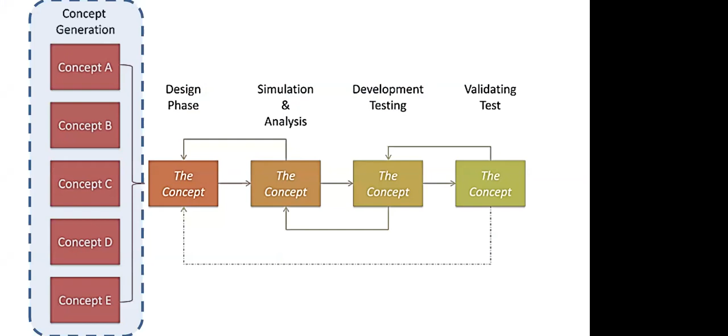We got a good number of registrations. We expect the same kind of people also getting connected today. We hope for the best. Sorry, say it again? We got a good number of registrations till date. Oh that's good. You see what happens in this industry, as more and more people get to know you, it spreads. So there's no harm if more people join and they get to know you more and more. Absolutely sir, you are right.

Okay, I think that hum is still coming. I don't know, it's very bad actually, it was not there last time. That's very surprising actually. Now I'm just going to see, is it by any chance from me? Can I do something with my mic? Is it my mic? But it's the same computer as last time. I'm a little surprised if it is so. Why should it be there?

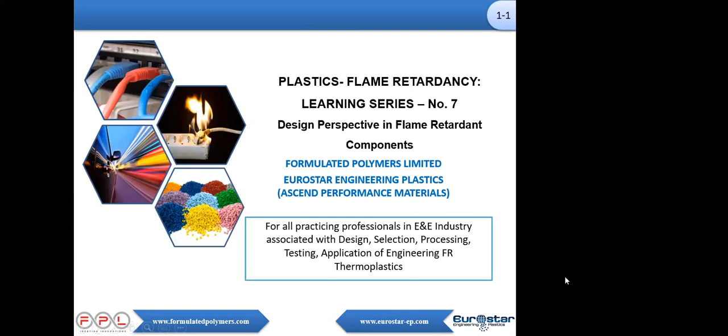I think we already have around 24 participants, so we can start. Incidentally, Prashant and Chaudhary, I think this is the time we had something like 800 people showed interest to participate. This is the 7th series, but we normally used to hit around 350, 400. This time, speaker being so good, I think we had 800 plus interest. I'm sure people will be joining.

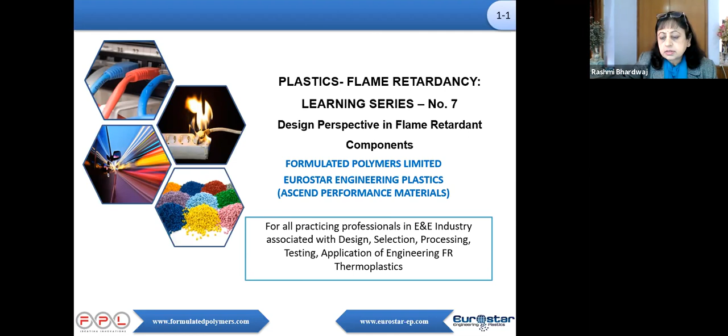Oh, I'm not able to change my screen. Yeah, just. So my name is Rashmi Bhardwaj. I'm Vice President Development with Formulated Polymers Limited. The webinar will be for around 45 minutes, 40 minutes of presentation and around 10 minutes of question answer.

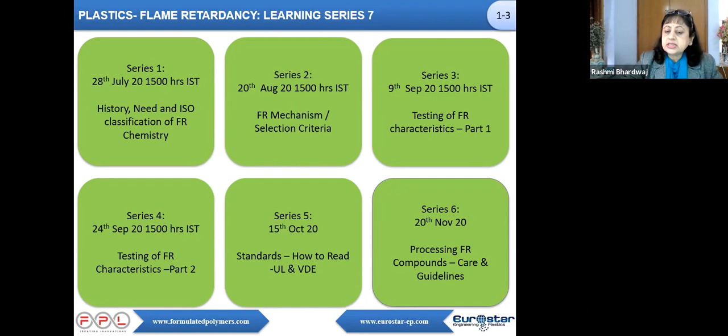Just to do a quick recap, we have done 6 series as of now on flame retardancy. First series was on history, need, ISO classification of FR chemistry. Series 2 was on FR mechanism and selection criteria. Series 3, testing of FR characteristics, part 1, and part 2 was series 4. Series 5 was on how to read various standards, and we had presenters from UL and VDE. Then series 6, Alexi and Satish gave a presentation on processing of FR compounds.

In future, we have series 8, 9, 10, and we will have a few more series also. The environmental impact of ROHS, REACH compliances will be the next series. Then we'll be looking into post-care, pad printing, laser marking, etc., and 3D. Then series 10 will be on cross-link polymer FR systems, and series 11 on applications of FR compounds. So basically, we'll be closing with the future trends.

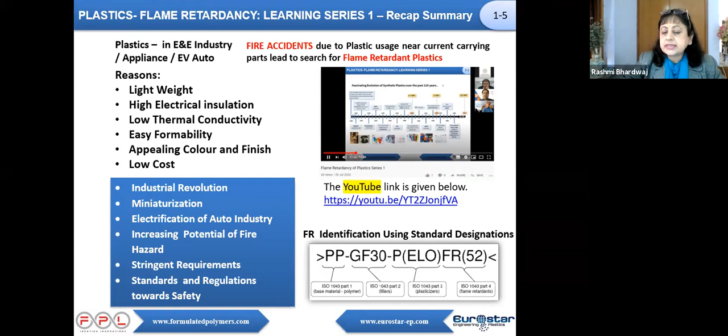In case we feel that there is a need or a request from all the participants, we will go in for a few more series based upon the requirements. All the series which we have done till date are available on YouTube, we have a YouTube link. Except for a couple of them, like in case of UL and VDE, it'll be available on their websites. So I think those presentations we have not shared, but all our other presentations we have shared with the concerned participants.

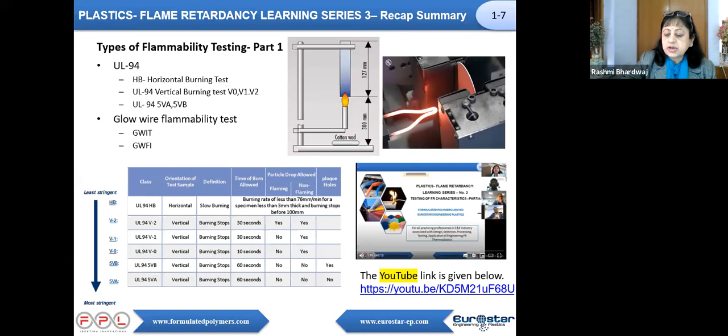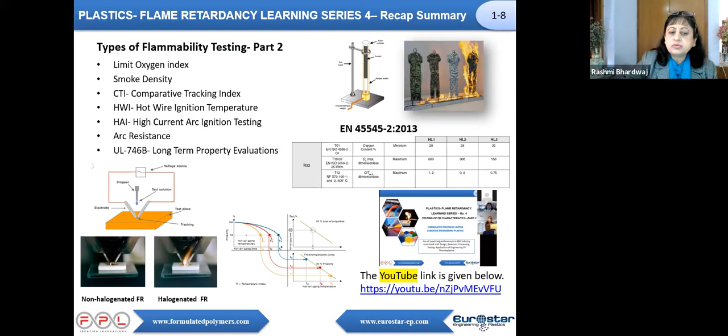For flame retardant mechanism, we covered various halogenated nitrogen, organic phosphorus, inorganic phosphorus, metal oxides, boron and zinc, silica compounds, and then we did a couple of series on testing. So we went into detail regarding the UL94 and the glow wire flammability tests, which are one of the most critical tests. We also covered LOI, smoke density, CTI, then hot wire ignition, arc ignition testing, arc resistance, also the long-term property evaluations as per UL746B.

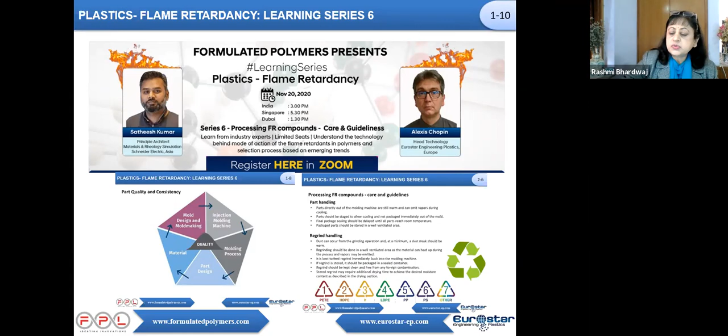This was a series where we discussed standards, how to read UL and VDE. In continuation, we had processing, where Satheesh from Schneider and Alexis from Eurostar Engineering Plastics gave us a detailed overview of the care and guidelines which we have to take during processing of FR compounds.

Some industry professionals have already presented, some have agreed to present. We would request industry experts and professionals to come forward and present future learning programs. It's a sharing platform, and we would request everyone to share the knowledge they have gained, so we can take this forward and make it much easier for the next generation working on similar products and looking for better performances.

Since Eurostar Europe and FPL Asia specialize in compounds of engineering polymers, most of the examples would be based upon polyamides, ABS, polypropylene, HIPS, MPPO, polycarbonates, and certain blends of polycarbonates.

Before we start talking about Formulated Polymers Limited, we have the Starflam grades and the Form Poly grades, both available in reinforced and unreinforced ranges, with various properties like high impact and tight tolerances. Complete UL yellow cards in all colors, with CTI values going up to 600 volts, RTI values of 120, which can go up to 150 degrees centigrade.

This is a slide which we have shown in all our presentations, just a summary of the FR systems, where we have a very high level of competency.

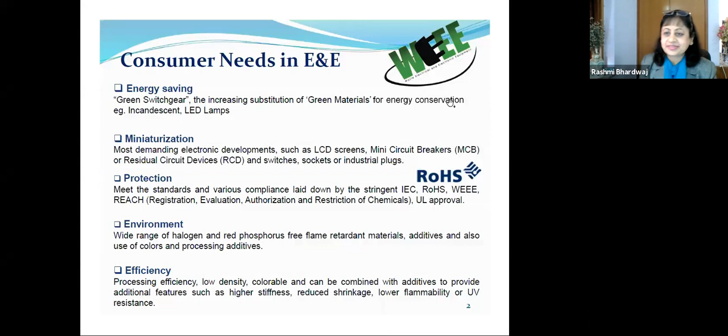So what we are talking about is the different criterias, one of that is the miniaturization. You are basically reducing the size of the product. The moment you reduce the size of the product, obviously the material quantity will come down, cost also will come down, and the panels, that is switchboards and other areas where we are mounting these products, that also will require less space.

Floor space will be less, but unfortunately, whether we like it or not, all metal parts, that is conductive elements like copper and silver, because of current density, their dimensions and thickness will not change. So whatever has to be compromised is the plastic part, and once the plastic part gets reduced, it has to withstand high mechanical load, short circuit conditions, and other severe conditions. Even temperature severity for the smaller size will increase. So as far as plastics are concerned, the selection becomes tough once you reduce the size. Of course, that is for added advantage.

Examples, as we know, mini circuit breakers, residual current devices, RCDs, and all, from a protection point of view, we look for certain compliances like IEC, ROHS, WEEE, REACH, all of which are already covered by the formulated series. Environmental aspects, when we say environmental...

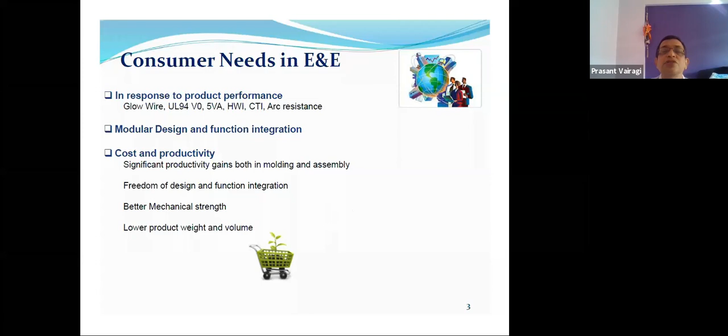Now, as far as insulating materials are concerned, various materials that we use are thermoplastics, elastomers, thermoset composites. We also consider alternates for metal, alternates for thermoset composites, and modified thermoset composites. I am not going to discuss much on insulating materials, but just to brief on the various...

semi-crystalline materials that we use - nylons, PPS, PBT, all types of polyesters, polypropylene, polyoxymethylene, polyacetal - what we commonly know. Amorphous materials like PC, ABS. Elastomers, thermoplastic elastomers I am talking about - polyurethane, EPDM. And alloys and blends like PP-EPDM and polypropylene-nylon 6. Those are also equally important.

Thermoset elastomers typically used are polychloroprene rubber, commonly known as neoprene rubber, and nitrile rubber. Neoprene rubber is inherently flame retardant, like how PPS is inherently flame retardant, whereas nitrile rubber is not, but nitrile rubber is cheaper. Nowadays, there is a focus towards nitrile rubber because of the cost aspect. Silicon rubber and fluorocarbon rubbers, commonly known as Viton, which is the brand name.

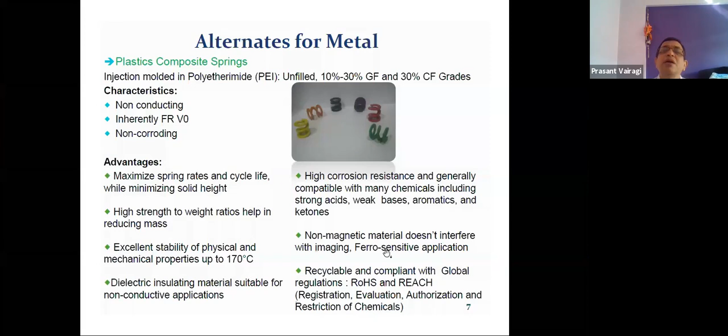From outside it looks like this is the handle, and when you rotate the handle, actually this is the rod for mounting it. When you rotate it, inside there is a bridge which moves left and right, going through a neutral position and making on and off positions. Now, if it is mounted vertically, the bridge, because of its weight and the metal contacts like copper, will fall down, so it will always create either an off or on position.

So in order to prevent that, the product designer has designed a spring. This is that spring, which you can see in blue color. Now the beauty of this material is that it is actually covered within the housing and bridge cross section. Earlier, we had designed it with thermoset, considering the arc aspect. But considering lower cycle time, productivity from the thermoplastic aspect, lower cost, faster production rate, and recyclability, we introduced thermoplastic polyurethane, which is working very fine.

So what aspects have we considered? High pressure and superior load bearing capacity, excellent flex life, high abrasion resistance, high cut or tear resistance. This is very important because the bridge material is thermoset SMC with 30% glass reinforcement, so it will abrade the material like anything. Oil resistance or grease resistance is also needed, since contact grease is used. So all these aspects, excellent noise abatement, and vibration dampening are things we have to consider while selecting a material or even designing the component.

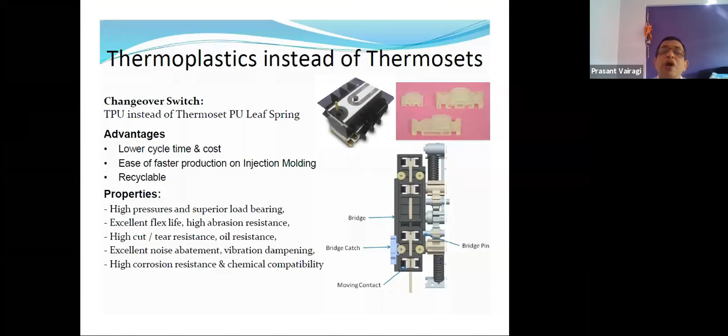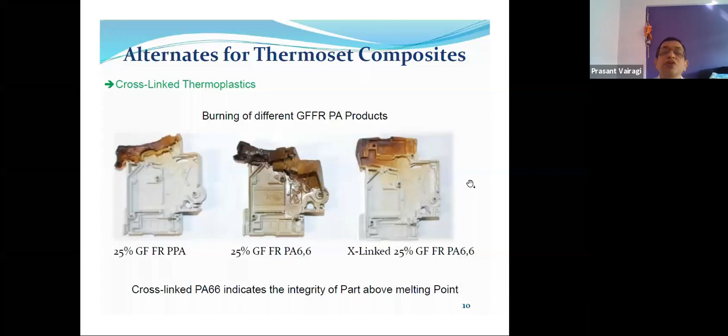Whereas if you see here, the cross-linkable material has only given a white stain. Here also, if you see the glow wire, it is only a stain mark. You can't see any other effect as far as melt deformation is concerned.

So this can be treated as an alternate to thermoset composite if you go about it the right way. It is basically for boosting the short-term high heat resistance while keeping the same injection molding process. That means your thermoplastic mold will remain the same. You can take advantage of all the thermoplastic design features, which is not practically feasible with thermoset material.

FR V0 glow wire 960 compatible, it is a good balance between mechanical and electrical properties. The only disadvantage I can see is the higher cost, because certain other advantages, like WEEE ROHS compliance and good surface appearance, as it is thermoplastic, the surface appearance is excellent.

Design freedom versus thermoset is basically you can design thin wall moldings, you can have click fit sections, you can even do ultrasonic welding before radiation. So all those advantages, whatever the product designer feels like adopting, he can do, and later on do the cross-linking. So faster cycle time, colorable, laser markable, with lower weight versus thermoset. Thermoset materials density is high, the weight is also very high.

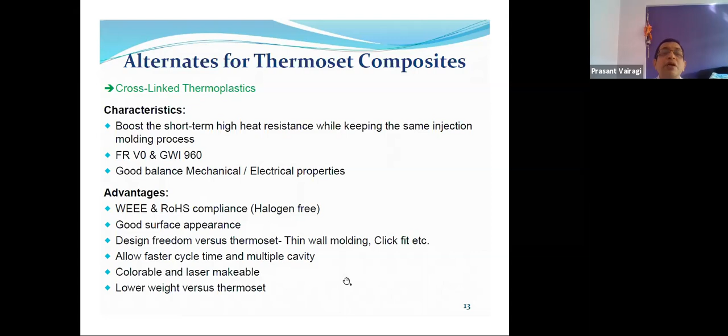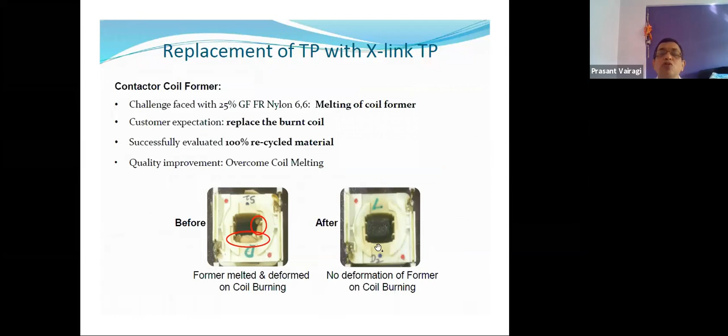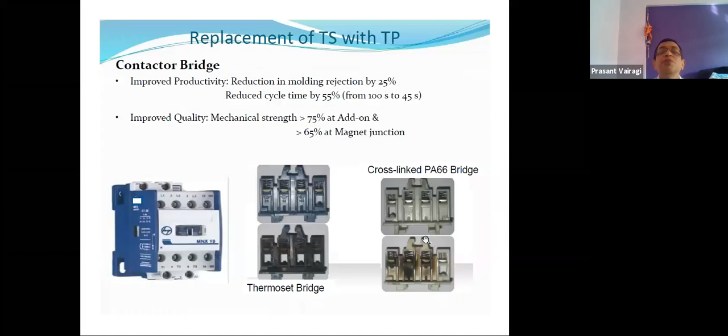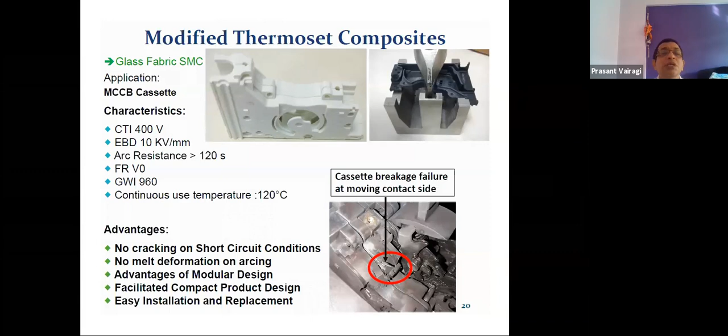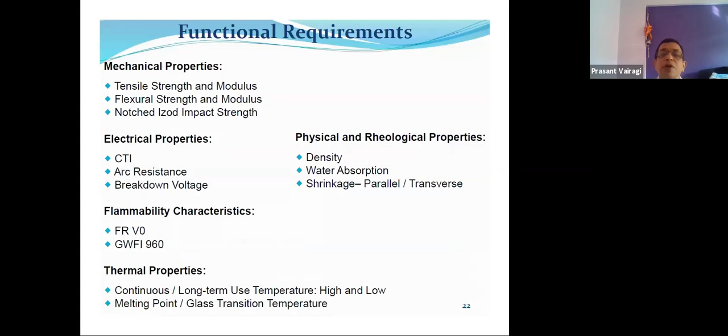Okay, another case - electrically conductive polymers. Basically, this is the material which is nylon 6 with copper fibers into that, and with tin as the filler element, because then finally the copper fibers get connected with the conductive material, and you can inject that into a path which already has a recess into a thermoplastic material, and you can have a resistor, or you can have a small electronic circuit with a cell which will give you products like this.

Okay, you can have these kind of moldings. This black part you are seeing is that conductive polymer which you can inject. You can do it with hot runner mold design concept, and you can see this is also the path which is a conductive polymer, whereas this is the metal part.

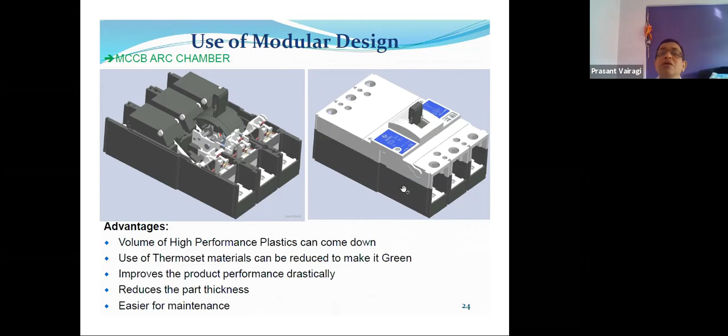That's fine, so this is the actually sectional view. This is another case whereby polycarbonate is used with thermoplastic elastomer, wherever there is a push button kind of requirement. There is a hole below, and you can press, and as there is no support for polycarbonate below, you have actually eliminated additional components. You can also have IP protection, which is a very important criteria for all these electric products.

This is the contactor, another classic case. Entire housing can be of FR by IEC standard requirement the moment it is having a live terminal. So instead of having the entire component in FR, we have introduced a small component which has a live terminal into FR, glow wire 960 and CTI whatever requirements, and the rest of the material is now non-FR. This is how one can use designer skill.

Another classic case whereby this is the contactor what we are manufacturing. There is not a single hardware to assemble it. All those click fit applications, whatever hardware you are seeing, those are basically for live termination.

This is another case whereby you can use thermoplastic material for actually burning, which is used as an ablative material. Of course, this is FR material and burning in controlled condition so that it quenches the arc.

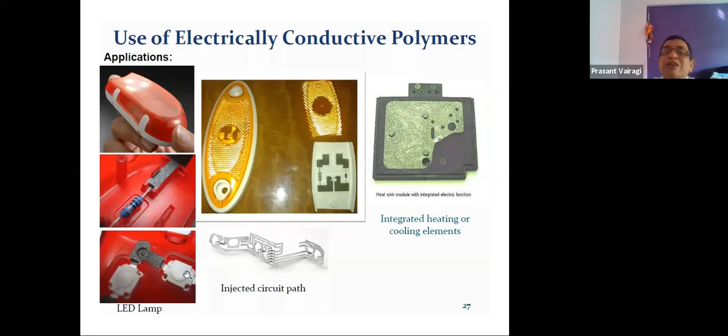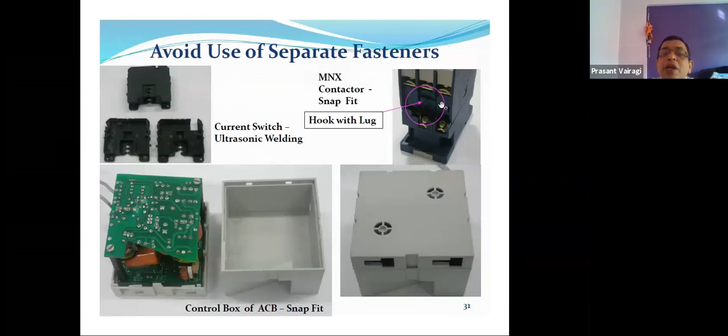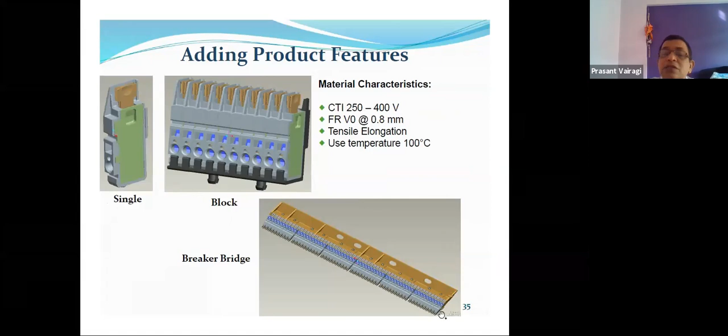Contactor assembly, you can see here. There is absolutely no hardware which is used. Whatever metal part you see here, they are actually for live conductive parts. Even the rubber pad which is mounted below the magnet is also anchored within the material itself.

This is another case, assembly feature whereby wrong assembly should be prevented by certain design feature.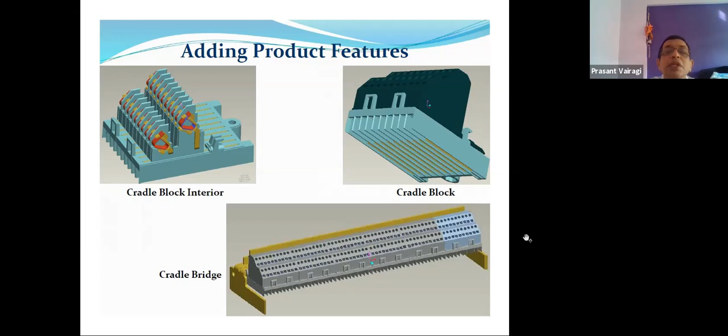Another component, that is air circuit breaker, which I have shown for that cradle bridge. The single component has got multiple requirements. It should flex in certain area for click fit area, assembling the other accessories onto that. At the same time, it should be very rigid and meet other functional requirements. So the component design and material selection becomes very critical for such kind of requirement. But then one single component, if you see this gray color, this is the single component on which various things are mounted for various functional requirements. This is the total assembly onto the air circuit breaker.

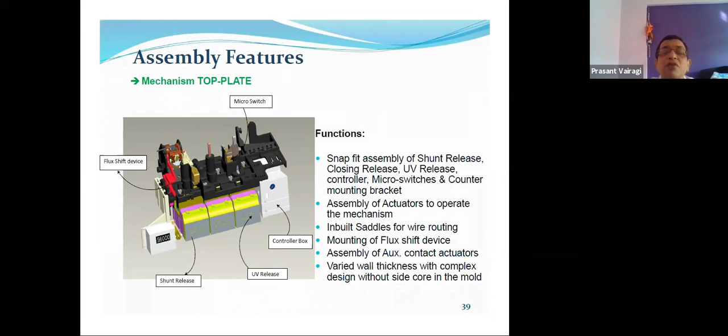Electromagnetic function for coil former is another criteria what we do. And product aesthetics, finally, if I have to talk about, color, texture and transparency is very important. This cannot be compromised. Form of the material, you see the earlier contactors and now the new range of contactor. You can clearly get a feel, whatever you see, you feel like using it or buying it kind of thing, even the contour.

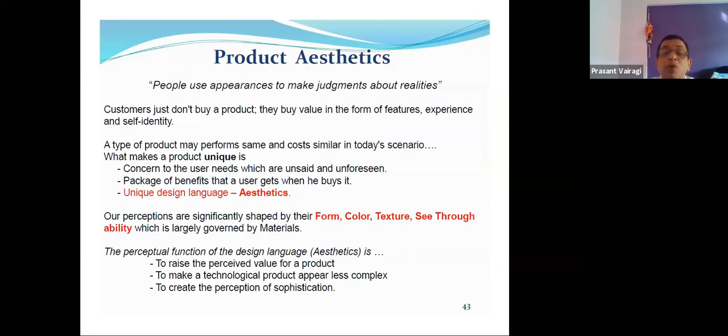Now the important thing is that one single material, if you mold, this is the single chip with glossy finish, semi-gloss, matte, semi-matte and matte. Now if it is molded in the single material, with the single machine, single time, but then appearance is different. So one has to also understand what are you comparing, what is the base. I'm not talking about source of light, that is a different story altogether, but I'm talking about the mold finish, that is also equally important.

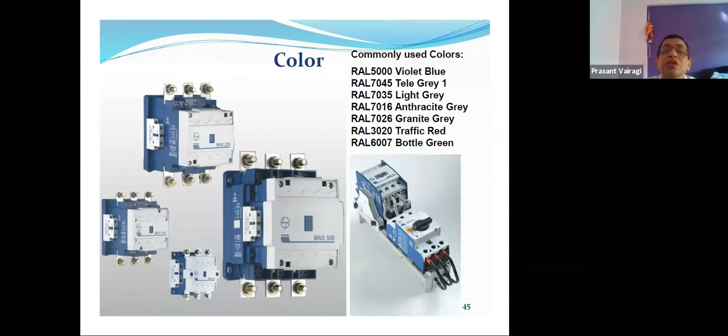Now these are the other textures, where we can use texture, and this is the latest range of contactor from the aesthetics point of view.

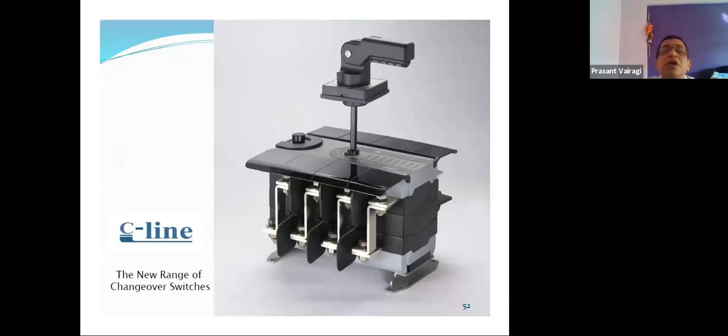These are the switches. That's it, thank you very much for patiently listening to me.

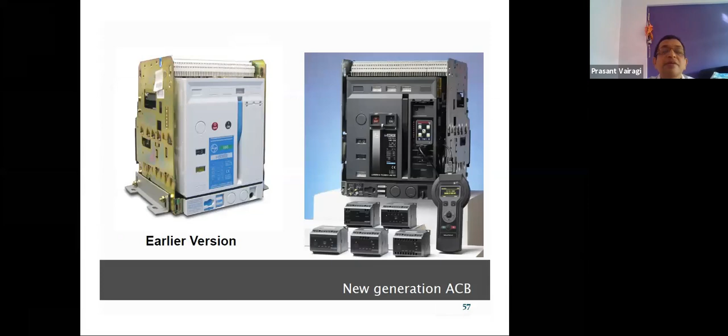You discussed in toto regarding the insulating materials, gave a brief insight on the types of materials along with the functionality requirements. So I think product applications as well as aesthetics are important now as we move forward.

You gave us some very good examples in terms of MCCB, the thermal magnetic release you talked about, then composite springs, new materials, or the latest trends as far as materials are concerned.

Then you gave us a very good example in terms of thermoset and a conversion to TPU for an application where recyclability has also been taken into consideration.

So cross-linked polymers, I think that's one of our favorites. Definitely, I think as we move forward, it'll be a growing market. And I think LXE would be very much interested that the market grows substantially for cross-linked polymers. So thank you very much.

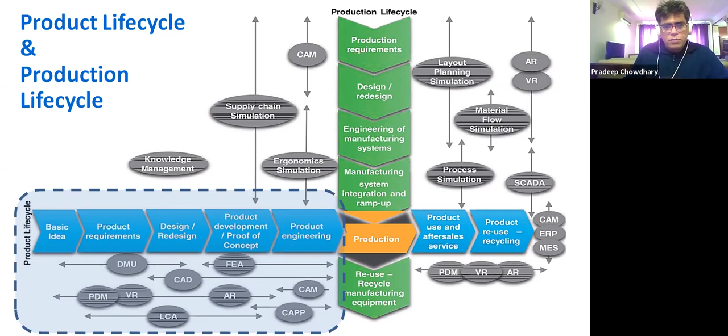So the accuracy of the model and the intent of that model has to be extremely good.

I'll touch upon this in a little detail, particularly from the viewpoint of the E&E industry.

When we're using FR plastics, we can do validation, which can even go to clearance and creepage validation at the design stage. We can go to electromagnetics, and of course the standard evaluations of ensuring part fills well—moldability, manufacturability—but also in terms of assembly, doing stress and thermal checks, etc.

So this entire gamut of development required in the electrotechnical industry is then centered around the model-based definition.

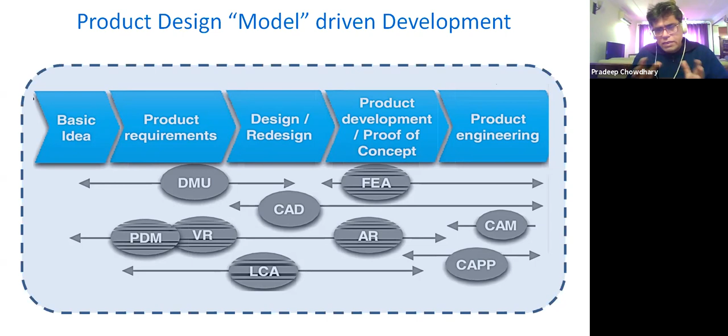Simulation is very common, I just want to touch upon that. Today the fact is that entire automobiles, airplanes, jet engines are being made multi-locational. There is a global supply chain.

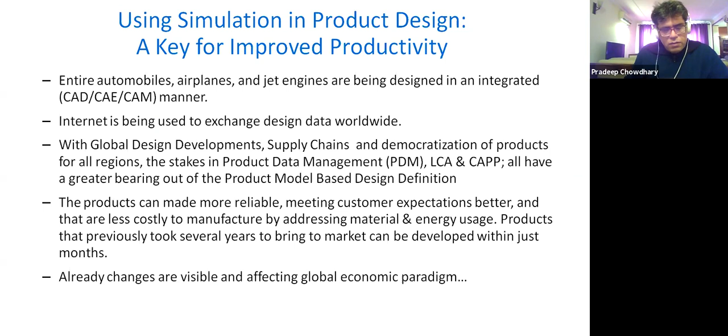The design teams are spread all over the world. There are design standards that we need to adhere to, and a lot of virtual mapping of these processes, techniques, test methods, and prototyping methods is actually getting converted to simulations. That has changed or redefined the design process itself.

A complete shift from the traditional design process is happening, where starting all the way from the selected concept model, when it's converted to a model, the iterative loops are happening virtually at the design desk itself.

Of course you need the domain knowledge and experience, and we need to know exactly what we are looking for in terms of standards or virtual tests that need to be done. But prototyping is getting virtual, thermal checks are getting virtual, mechanical checks are getting virtual, drop tests are getting virtual, electromagnetics is getting virtual.

It's really virtual functional prototyping happening right on the design desk. In that sense, the design model itself has evolved and changed.

The way I see it now, in the old days we used to say a good part is a combination of a good material choice, good tooling, good processing, proper tooling construction, and good design. I think it's still true now, except the process has now become: a good part is a combination of a good part design and good production.

The good part design has evolved to encompass all the other things which are late stage processes, which are getting incorporated right at the design stage. In that sense, the product design has come right in the center.

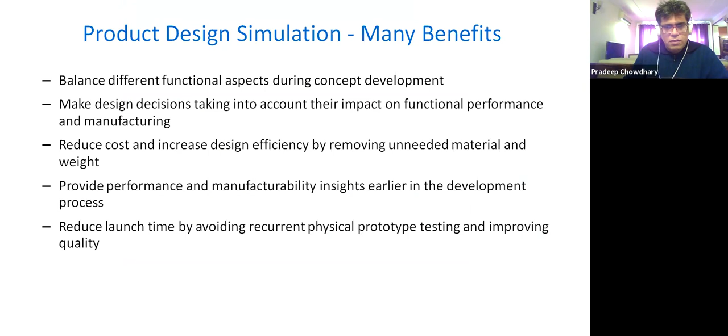I want to touch upon this again, because all the way from user needs and ergonomics to looking at our production planning process, and even manufacturability, tooling, additional SPM required or whatever, revolves around our consolidated model-based definition that evolves from the product design today.

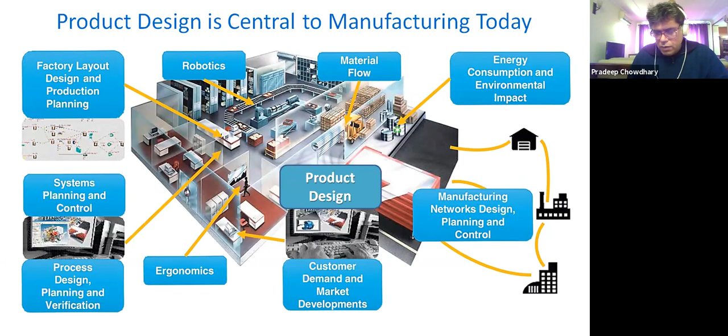So I'm going to take an example to walk you through this experience using a sensor. It's a current sensor.

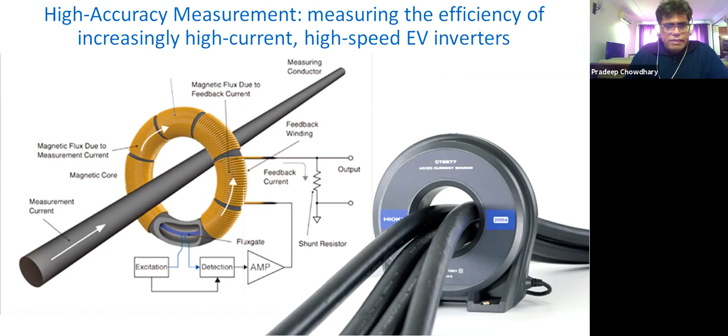This one is for particularly very high accuracy. It's used in the electrical industry, in EVs and HEVs, and there are various types. The main idea is to sense the accuracy of the current or voltage, in this case current, in as accurate a way as possible. And when we're dealing with 2000 amps or 1000 amps, there's a lot of sensors and technology going in there, various kinds of coils sensing this, which eventually translate back into measurement of the current in an accurate way.

There are variations depending on the thermal profile. Some current sensors have heat sinks to dissipate heat and to protect electronics.

The one that has been taken as a case for this presentation starts with the concept, and a design was done. I will not get into the details of that, but show you what the concept looked like.

So a current sensor was developed here, and it met all criteria. A heat sink was designed to extract the heat out, where the PCB board was underneath the heat sink with the MOSFETs reaching temperatures almost up to 178 degrees. But the housing had to not be in contact with that temperature. The housing was coming to approximately 120, 121 internal heat in a passive situation - so we're not talking about the outside, we're talking about the inside.

So in this case, we met all the requirements and the product was developed meeting clients' expectations, or so we thought.

The challenges here were plenty in terms of material selection - V0 rated, which exact grade for that temperature, for the dimensional stability we needed. Accordingly, the PCB sizing and assembly had to be built. The heatsink also had to be sized based on the thermal profile of other internal components, assembly, tolerance, clearance determination for accuracy, maintaining that calibration and accuracy even during the assembly and production stages, and of course, keeping in mind the secondary operations.

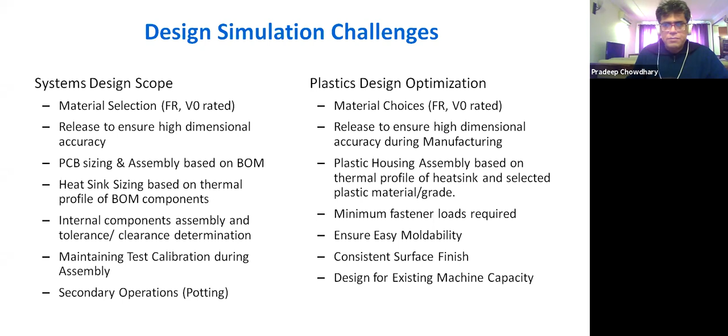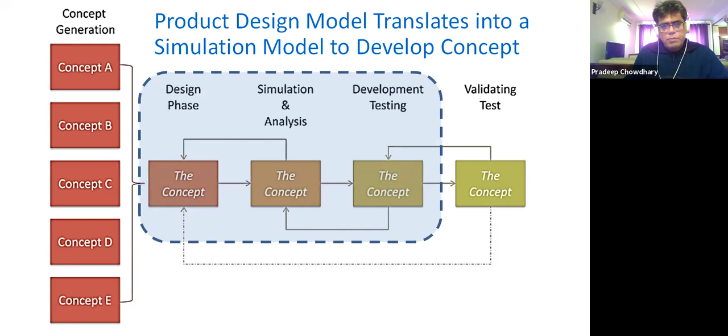And then we entered, of course, the concept validation stage with the model-based definition, models being ready. These are production quality models, fully drafted, and in all aspects - assembly, clearance, tolerance - have been taken into account. A lot of tests were done to optimize the profiling, spacing of heat generating sources, number of fins, width, length, height - everything, all that was done.

And on these concepts, finally, one concept was chosen which gave the best heat dissipation and the lowest profile of temperature along the outer edges, which was extremely suitable for the plastic housing. And the design was done, or so we thought.

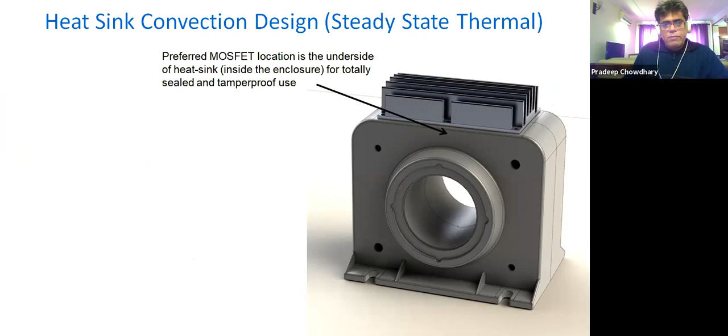It was time for us to get the raw material supplier and the tool maker in the game and look at the simulation results from the viewpoint of moldability. The FR V0 material was chosen, the proposal looked good - I mean, we got the project in the bag.

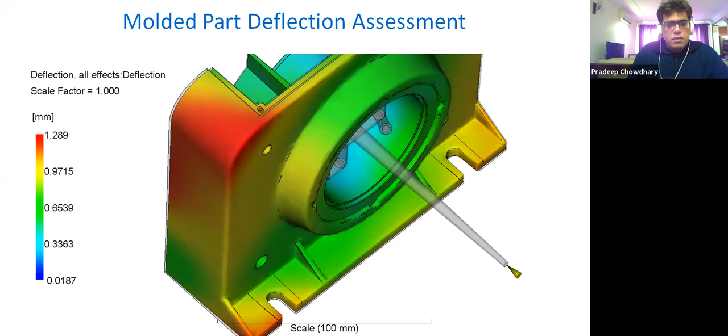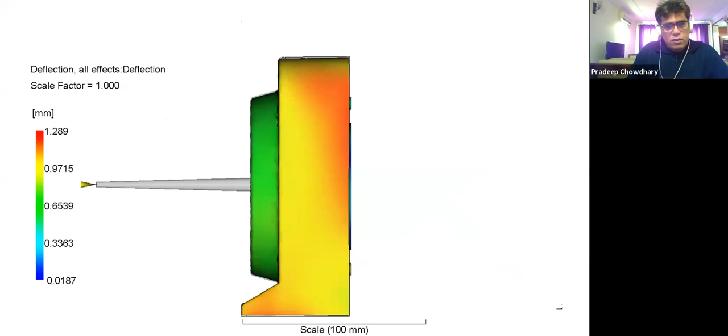Then came some results. With this semi-crystalline material, even with very balanced center-fed gating, we got extremely high warpage. Deformation came, and the variation of that deformation was a bigger issue because on some corners the fiber orientations, and on other corners the fiber orientations, along with volumetric shrinkage, meant this deformation was going to have a different effect on different areas of the part.

We tried a couple of different materials, but we could not contain the deformation to less than 0.8 in the direction of our assembly, which was a huge concern for a part that required extremely high dimensional accuracy at the time of assembly. So we looked at a way to contain this deformation because we didn't want to give up on this product design.

The solution was to use the fasteners. There were 4 fastening locations on this part, and we mapped this deformation back into the stress analysis program to look at fastener sizing and the stress levels we would get for the same deformation, trying to match what the final product assembly would be with the fasteners in place.

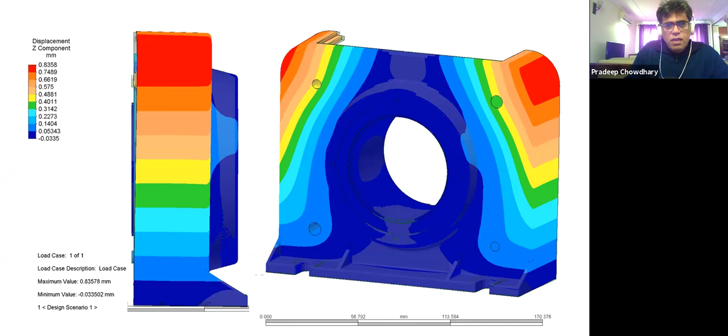Though you see here 8-9 megapascals of von Mises stress is manageable for the housing, it was not acceptable for the loading the fasteners were required to do, the fastening force. So for this kind of a product, we did not need a very high fastening force.

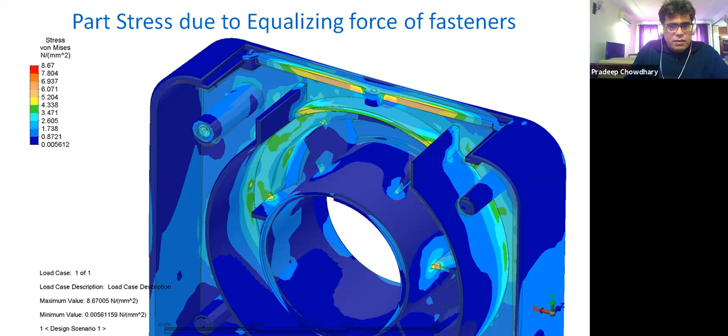The project simply was looking like not going further. Further, we got sink marks in certain areas going up to 100, 120 microns with this material. So a lot of red flags were raised with the design analysis. Warpage levels were not acceptable. Stresses were not acceptable, fastener sizing wise.

And then after the discussion with the tool maker and the raw material supplier, we decided to use an amorphous material with a lower thermal profile, but with V0 properties, of course. The idea was, can we get better accuracy and reduce the holding force?

So the plan ahead was to pick this material into simulation, look at the heat sink also, because somehow we got the thermal profile of this material was a little lower than the thermal profile of the semi-crystalline material. So what could we do with the heat sink to improve the thermal dissipation further? This was the scope that was decided for the second stage.

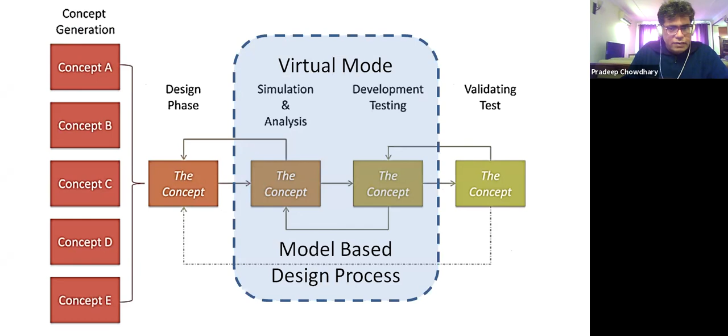So again, we are iterating on the design desk. There are no real capital investments made yet. The concept has not left the design even into the prototyping yet.

So a new study was done with a different material, and we got fantastic results. Fantastic because even though we have a warpage in the assembly direction of about 0.4, it's extremely uniform along the edges. So it sort of neutralizes in terms of within tolerances. The net effect of warpage that we saw was just barely about 100 microns, which was extremely comfortable with the fasteners to assemble flawlessly.

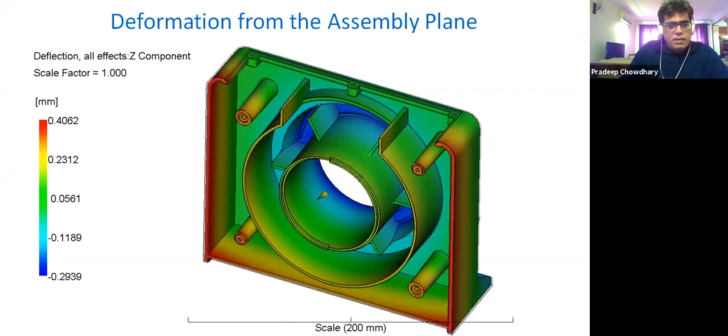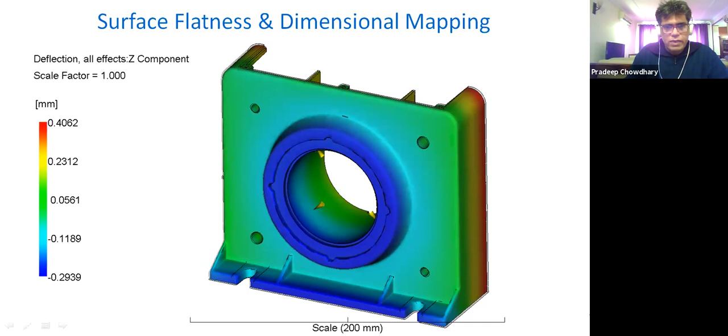So then the challenge was to redesign the heat sink, and we could not get the lower thermal profile because the heat sink was already optimized. So we used the housing to reduce the rounding on the sides and to create extra space for the heat sink, if you can see my mouse. We managed to get about 20% more area on the housing opening for the heat extraction. So we were able to resize the heat sink doing that and drop the temperature down to 92 degrees, which was extremely comfortable for the new material.

And so we proceeded with the project from the design desk. First trials from the tool, review of the lab test with perfect results achieved, project closed.

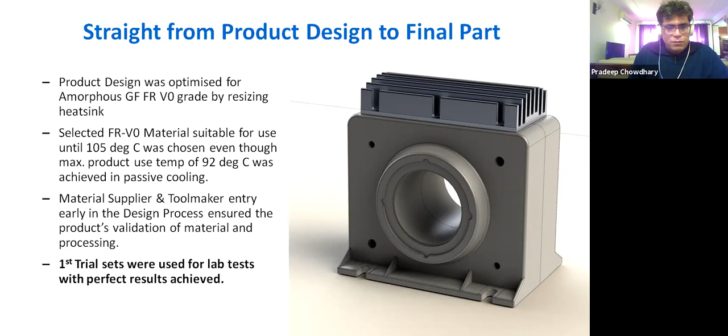So I want to talk with this example, the benefit of the simulation, because it has a huge benefit in the E&E industry. Simulation models offer a lot of flexibility. What I've seen in my experience, when we are doing design and we are doing stack up of clearances and tolerances, and we want to look at the assembly functions, we want to look at the model interaction, part interactions, we want to look at the dynamics, we want to look at load transfers, we want to look at other effects.

So many times when we do this level of virtual prototyping, say I have a model, I'm doing all this, I cut through a section, it's a virtual slice, I can see the effects right through the section, right through the thickness of the material, which is impossible to do in real life. I can't even put a sensor there. So it's not just replacing or an alternative to real life tests or development. It's giving absolutely new dimensions or avenues.

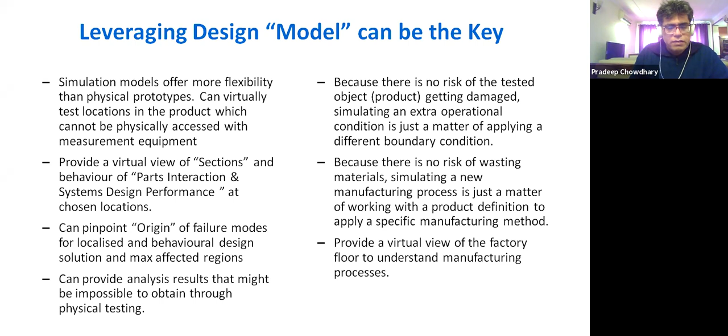I've seen some cases where parts had to be evaluated at certain temperature where we don't have the real life facility to make that operating environment with those low temperatures or those high temperatures, but in simulation we can do that. So there are tons of advantages in simulation of various kinds, but you need to have a lot of expertise on the design desk to do that. I want to give you some examples.

For aesthetics, for a product designer, surface quality is extremely important. Of course, we do structural analysis, all kinds of fatigue, thermal, vibration, event based analysis. Something happens after a while, then what is the effect, etc. And of course, CFD, electromagnetics, HVAC, etc.

Specific for plastics, drafting all the way: checks, core cavity extraction, moldability, part material filling. Am I going to get short shots? Am I going to get air traps? Am I going to get weld lines? I can do machine sizing. If I have a certain equipment, I can actually design my part to be processed in that equipment. I can balance all that. I can do my cavity layout of multiple parts and do runner balancing in such a way that I maximize productivity. So all this is possible straight at the design desk.

And of course, there are lots of other analyses that we can do. I just want to throw you some examples from other areas which are also relevant in E&E. I mean, you'll say, what has car to do with E&E? I'll tell you. So CFD is a very common tool which is used in design of automobiles. You would have seen all kinds of fancy cars, race cars, driving this technology, rockets, even military equipment and whatnot.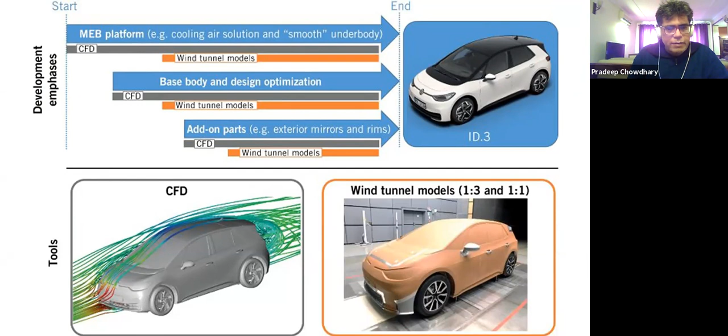Here you see an example, a very simple example of a car, I think it's VW ID3, where CFD was coupled along with clay models for the wind tunnel tests. But the way the coupling was done was not only to reduce the times of development, but also to make extremely lower investments, because you could do the test with the scale models, which were representative of the model-based design definition. And the changes and the optimization of aerodynamic profile was all happening virtually, and this process kind of cut the cost and time down in a very big way. Same thing you see in trains these days, whether it's high-speed trains or maglev rails.

Huge contribution is being made with the CFD techniques. We are talking of trains that are developed for 300 miles an hour. Here you see an example from the concept to the reality on the right. All these are real life development examples.

So what has CFD to do with E&E? It has to do with the conjugate heat transfer. As the products are getting miniaturized, high frequency products are coming in, the thermal profile is going higher. So there's a lot of pressure on reducing heat. It's usually done by heat sinks, forced air cooling, but it's also done by laying out the components, inlets, outlets, setting up that domain where the extremely high heat generating and highly miniaturized electrotechnical solutions are also possible with reliable working ranges by balancing heat extraction using CFD.

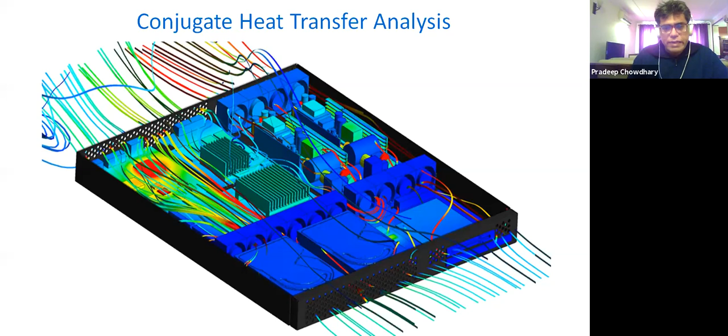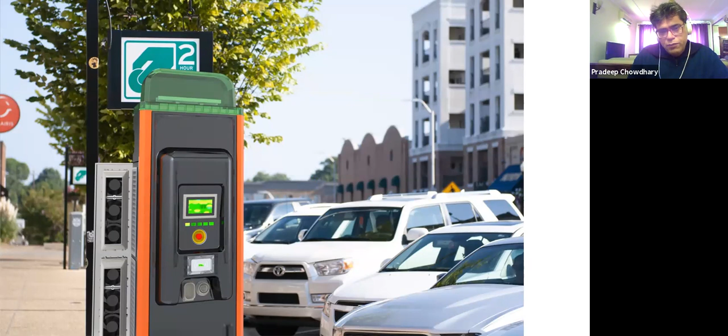So this is the same technique as used in the design of automobiles, but for a different purpose altogether for the E&E sector. Here you see another example of an EV charger. This was done by me last year for a European client. Here we used these techniques extensively to get a lot of high wattage development in a very short time of development, as well as in a very compact form of the charging solution.

This is also a technique used in data centers. So basically, you have thousands of computer chips and heat sources generating heat that needs to be extracted, basically in all the areas where there's user comfort at stake, even in hospitals. So this has extremely vast application range.

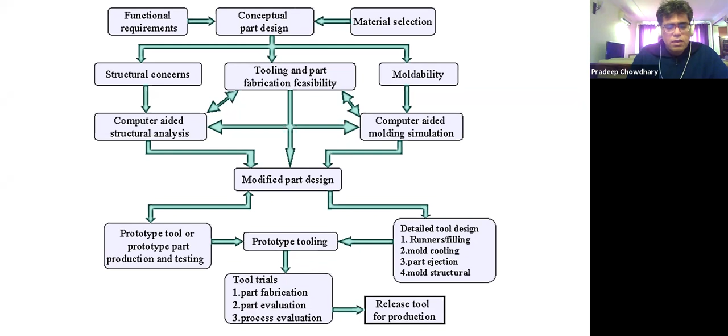Of course, hydrodynamics. I just want to give you one example from plastics as well, since we are talking about plastics. Everybody knows about this model of development, but I just want to give you one example of something very unobvious, a very simple analysis of shifting gate and weld line for aesthetics.

Now, this is an example of an automotive part. The red region you see over here is not the place where a weld line is required, is not the place where a gate mark is required, is not the place where any flow mark is required. And these places have been demarcated because they are seen by the user. It's a sort of a bezel which will carry the instrument cluster inside. And with the way the planning was done by the tier 1, it was always getting some sort of a mark, some sort of a weld line.

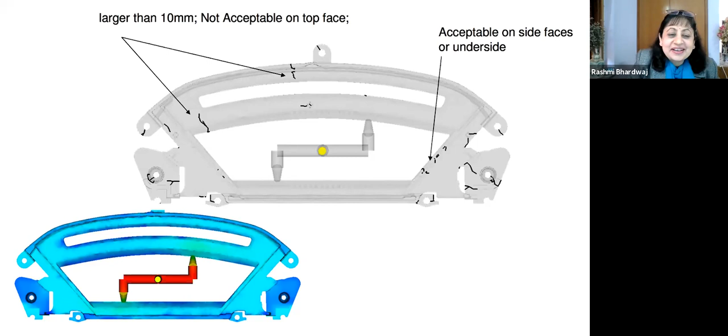And even though a lot of variations were done, but can I break in? We are actually running out of time. Yeah, I have 2 more minutes. I'm done. Okay, sure. Thanks.

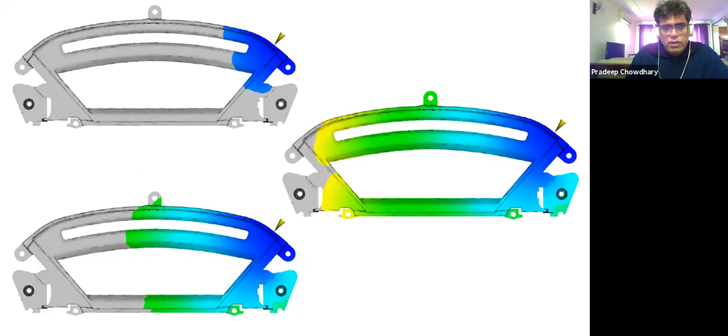And so we just looked at a different gate location, in this case from the side. This was, of course, after a certain design of experiments, and you can see the progression, and the weld line was relocated on the side.

But the good thing was it was a planned decision, and as you can see, the weld line was located where there was a structural area and not the visible area. That area was getting covered by an overlay part. So eventually the visible area of the bezel became absolutely flawless.

So I want to conclude now. I just want to say one thing in the end. A lot of this revolution is happening, which is coming on the desktop of the designer to look ahead. But of course, a lot of knowledge and expertise is required, and various experts sometimes get involved. But also what is important is this design thinking and solution building is coupled with the organizational management's objectives and goals. Because even if you're going to set up a new shop floor or launch a product in the marketplace, the same common design building block, the design model, can be used. It can be used for furthering technology, launching new generation or evaluating new generation products, and it can be used for even things like IPR or marketplace studies or virtual presentation of a product that has not even launched yet, for say crowdfunding, for example. So it's very inherent and moves together, and this process has huge benefits. Thank you all for listening.

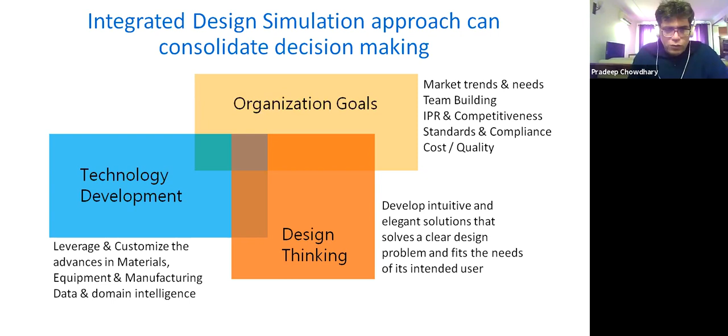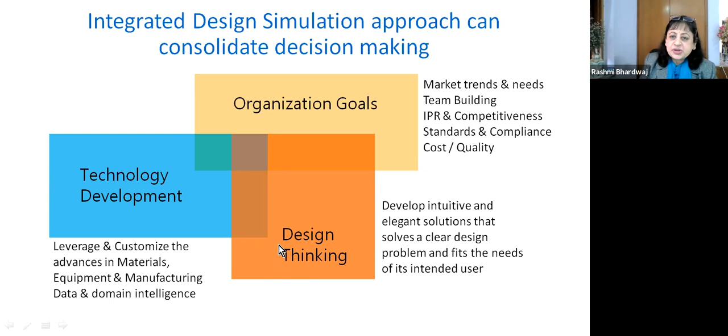Wonderful presentations. I think Pradeep covered right from concept generation to the design simulation, development, validation testing. And I think product life cycle has become more and more important as we move forward. So feasibility of the concept and actually taking it to the field, making it work. I think the entire process with examples has been covered superbly. Thanks, Pradeep. A wonderful presentation.

And I think although we take into consideration some critical success factors, part design has become more and more important as we move forward, and simulation has become critical, especially for aerospace, railways, the way you gave the examples. So moving forward, I think these areas are the next gen requirements, and they will definitely get integrated into the system. So what Prashant talked about was miniaturization and the aspects in terms of designing electronic components, vis-a-vis taking into consideration the heat generation, which was covered by Pradeep. So I think both have covered the design aspects very beautifully.

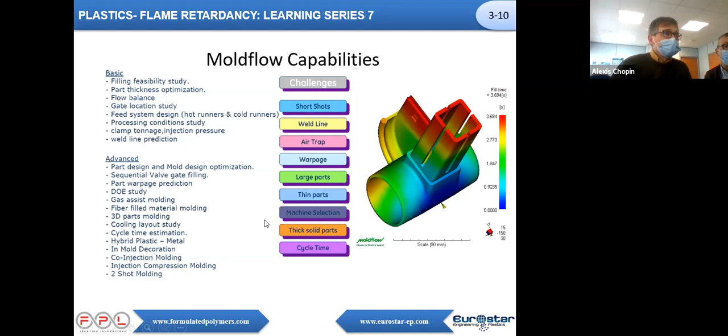Okay, so maybe next page. I'm trying to go fast because, of course, we are running out of time. Yeah, we are actually out of time now. Just to explain that generating a UDB file, meaning a file to characterize material, is not a piece of cake. It's really a big work, because all the viscosity, thermal, mechanical properties has to be tested. So we have some, but in each case, unfortunately for us as a compounder, we cannot have it for all products. But let's say when we have the data, the experience is that it correlates very, very well to the reality. But once more, I won't go into details, but each time when we generate a UDB file.

Hello. He's not audible. Yeah, I think.

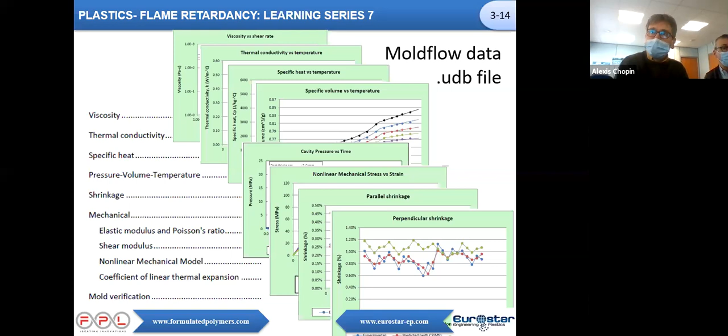Otherwise, the single limitation we see, or the single feedback we have, is that sometimes surface defects cannot be predicted. This is maybe not true because it made tremendous progress, but the weakness I'd like to point out is I don't know to which extent it is possible in software, but the shear on the material really has to be measured or estimated, and the correlation between too much shear and a surface defect is not as obvious as a decrease in viscosity. So from time to time we still have surface defects in flame retardant grade, but to me it cannot be explained really by simulation. But maybe Pradeep will say the contrary, because he's much more up to date than I am on those ones.

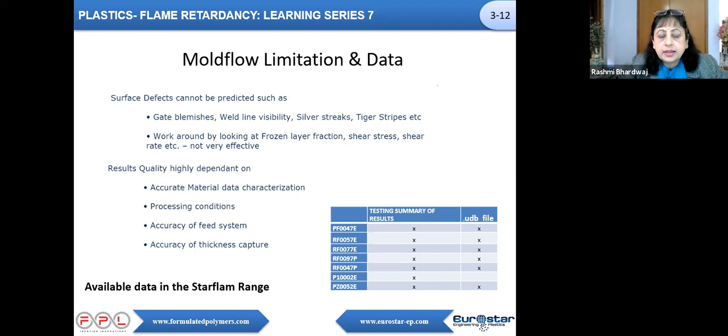Thanks, Alexi. There's no sound. Hello? Yeah.

We can hear you, Rashmi, but hi, how are you, Gils? Hey. Good to see you. We are not able to hear you clearly somehow. Alexi? Yeah, I know, maybe my computer is worn out, I have to change it, but okay, we can hear you. But the single message I wanted to pass was really this limitation. But what a nice presentation today, really, I learned so many things.

Okay Rashmi, I think you can take over, and let's go into question and answer. Yeah, I'll go to the question and answer because I think there's a slight signal issue. We have a number of questions so I'll quickly take them up. One was on how can simulation help in any product launch? Will it expedite the entire process, or can we use it for our new products, or how do we work on it? I think this is for you, Pradeep and Alexi.